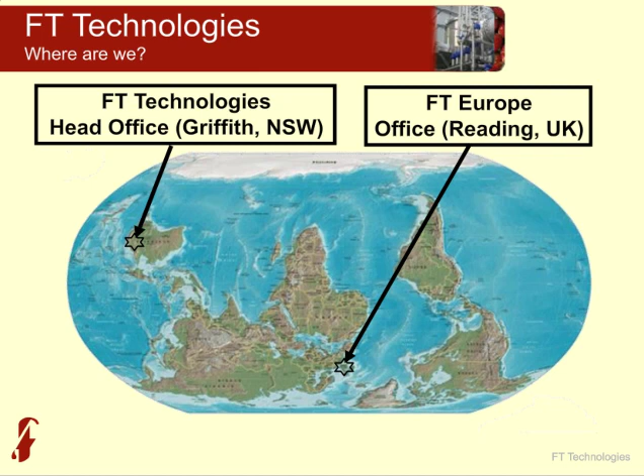So regarding today's webinar, you will find out about our spinning cone technologies. We'll spend a bit of time going through the detail of how that technology works, including information about our spinning cone column, our Centritherm Evaporator, and our integrated extraction system.

In addition to technical information, we'll explain how these technologies can be used in various applications in the food and beverage industry to improve your product quality and, in many cases, improve the operation of your business.

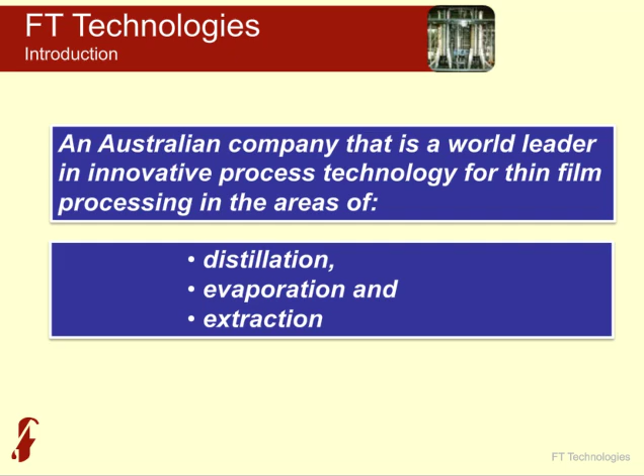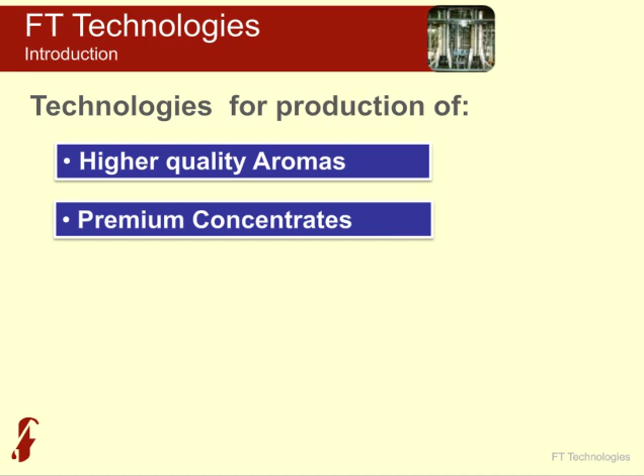We are an Australian company who, for the last 35 years, has been a world leader in innovative process technology for thin film processing, specifically in the areas of distillation, evaporation, and extraction. Our technologies and focus on thin film processing allow us to help customers manufacture higher quality aromas, premium concentrates, and high value extracts.

Using our technologies, we're in a lot of different industries for a lot of different applications. In the coffee and tea industry, we help customers achieve higher value products in terms of producing high value aroma for soluble coffee, liquid coffee, RTD teas, and tea powder. In the dairy industry, we're used by large dairy companies for deodorization of cream, but also for concentration of whey protein concentrates and milk proteins.

In the fruit and vegetable industry, we're used to produce natural aromas from various fruits and vegetables, but also to make high quality concentrates where we can retain the active ingredients of the products, as well as high contents and yields of polyphenols, antioxidants, etc.

In the pharmaceutical industry, our thin film technology is used to produce high-value products and for solvent removal. For botanical extracts, high-value products such as aloe vera and echinacea are processed through our technology. The protein industry uses it for soup stock concentration and bacterial broths, and the fats and oils industry for deodorization of vegetable oils and production of omega-3 fatty acids.

And in the alcohol industry, it's used for removal of alcohol from beer and wine to produce medium strength wine and beer, but also zero alcohol wine and beer.

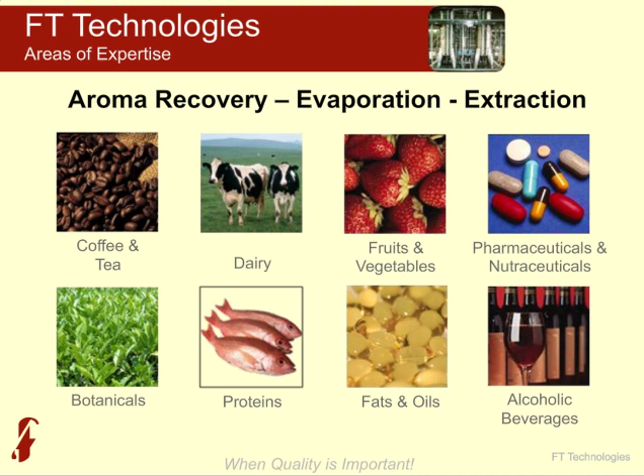So what we do in all of these industries is help you, the customer, grow. Customers keep coming back to FT Technologies—every year, 25 to 30% of our sales are due to existing customers returning, telling us that our technology is helping them grow and differentiate their product.

They tell us it's assisting them to make a premium product that allows them to differentiate from their competitors. It's allowing them to quickly and easily bring new products to market, and to increase their market share not only in their existing domestic market but also in other export markets.

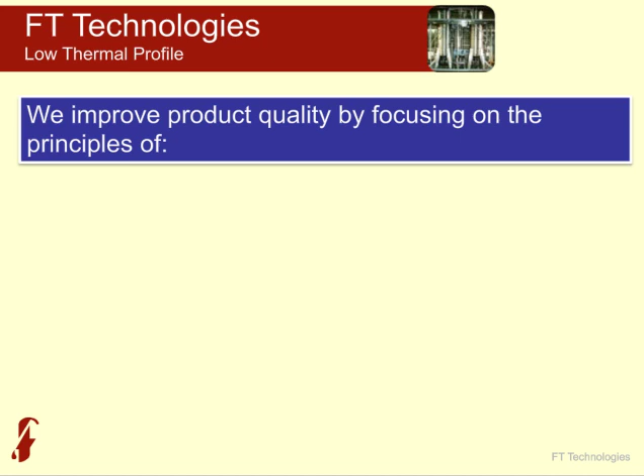Part of our expertise is focusing on the principles of low thermal impact. What we do is ensure that all our technology has short residence times and lower temperatures than competing technologies out there. Some of our equipment has heating times of only, say, one second to create a concentrate that is more concentrated than other technologies, and also has a higher yield of the active ingredients and color you're looking for. All our technology is built on a skid and is a continuous automated solution with clean-in-place functionality.

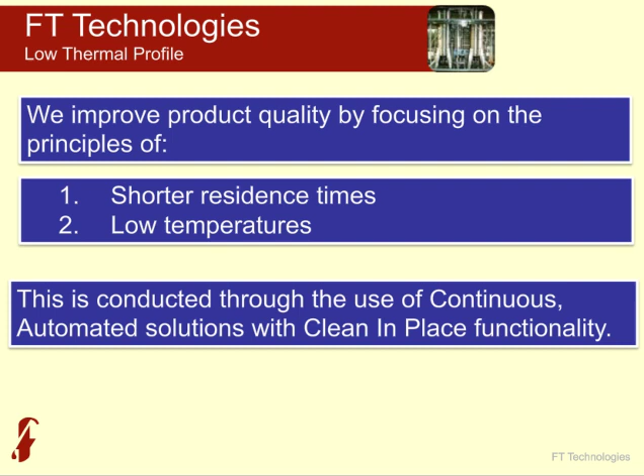Let's begin by looking at our first technology, the spinning cone column, which we developed 35 years ago specifically for the wine industry, but very soon found out that there were so many applications that we're still finding new applications 35 years down the track.

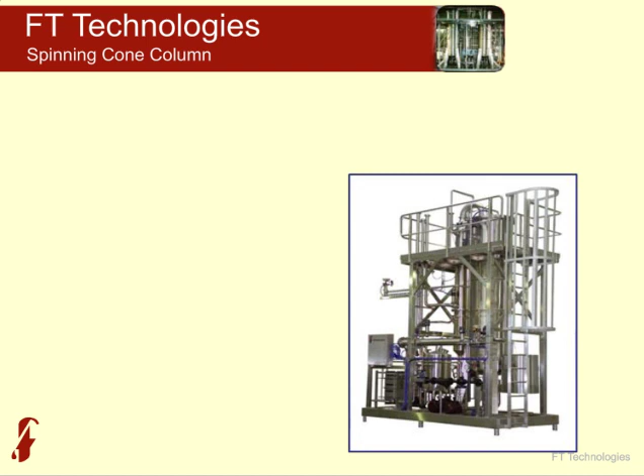The spinning cone column falls in the same family as other distillation columns, but more correctly is a steam stripping device where steam is used to remove the volatiles such as aroma or flavor from a liquid product that is spread thinly over the spinning cones. I'll explain that shortly.

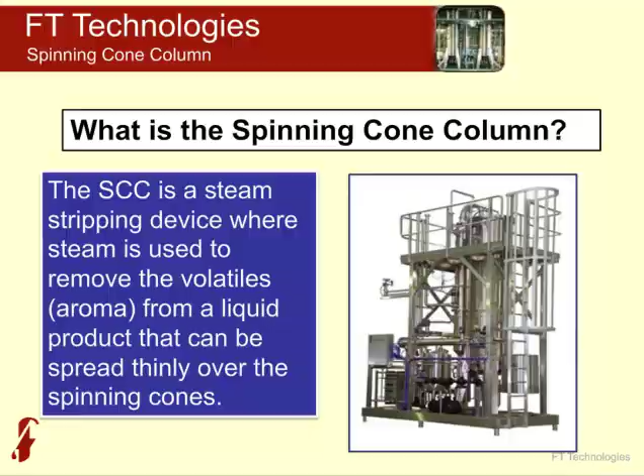The spinning cone column is unique compared to other distillation columns in that not only can it process clear liquids, but it can process slurries. By slurries, I mean tea leaves mixed with water, or coffee beans that are crushed and mixed with water being processed through the system, or viscous products. Some of our customers process mango pulp or banana pulp directly through the spinning cone column to remove the true natural aroma of the product. Products up to 7,000 centipoise can actually be processed in a thin film to remove the light volatiles that are so critical to creating a fresh aroma.

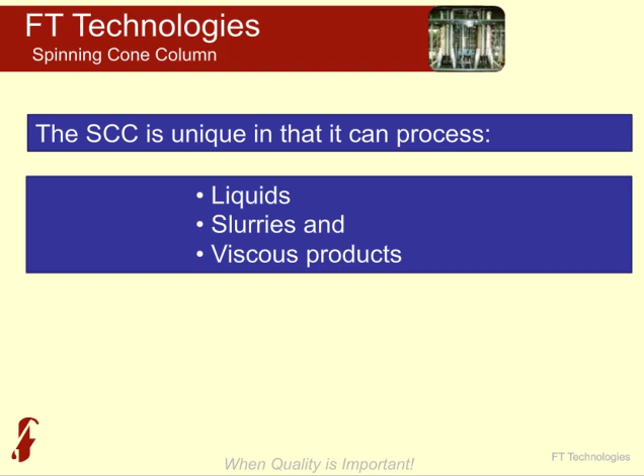The spinning cone columns create a thin film of only 1 millimeter across the surface, enabling short residence times and low temperatures to be used in the aroma extraction process.

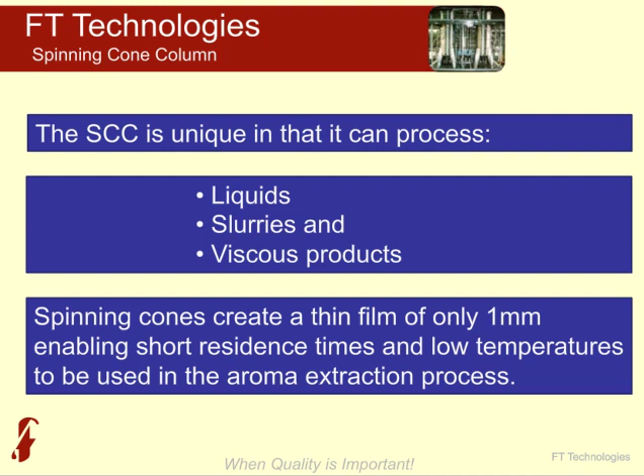The SCC is principally used for aroma recovery, and as mentioned, it can be from fruit, vegetables, meat stocks, alcohol. Various products can be processed through the spinning cone column easily and flexibly. It can also be used for flavor management. Some of our customers ensure that they have a standard product year-round, regardless of seasonal variation to their product, by processing through the spinning cone column.

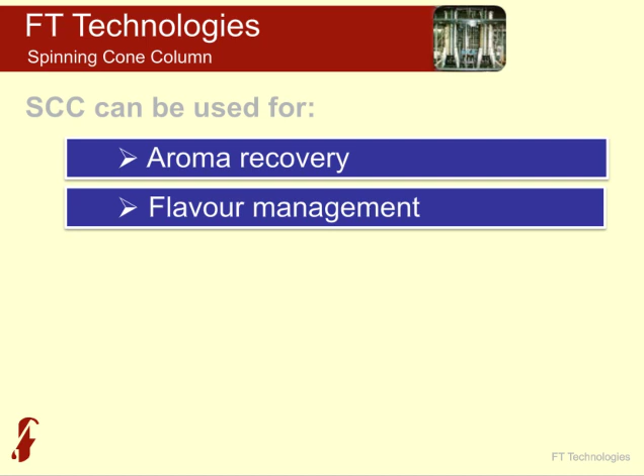In some industries, such as the ready-to-drink tea industry, at the same time as removing flavor or aroma, we can be extracting the soluble solids from the product. That is, brewing the tea within the column in that short period of time.

And in yet other industries, at the same time as removing the aroma, we can be pasteurizing the product if the temperature and time frame permits.

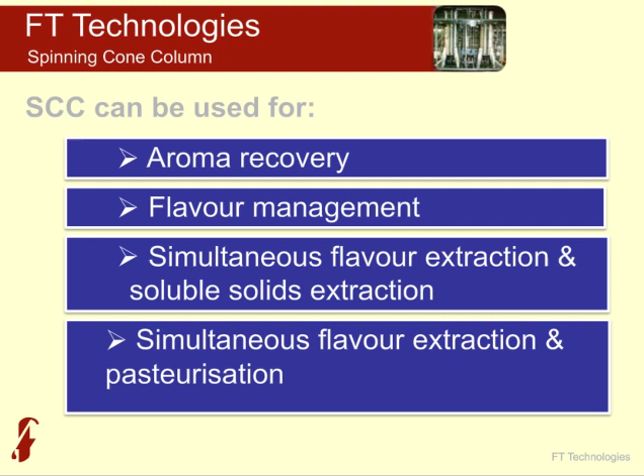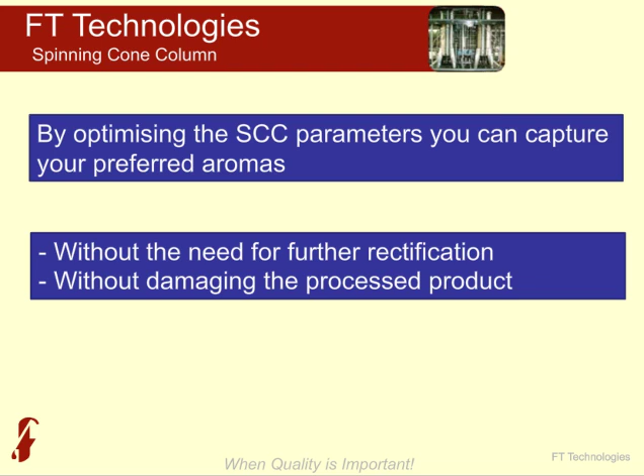One of the unique features of the spinning cone column is that we can optimize various parameters to capture a preferred aroma. This means the aroma that's coming out has no need for further rectification, but is the final aroma that you want to add back to your product. Also, during this processing and aroma recovery stage, there is no damage to the product being processed, so it can still be used downstream with no damage to color and no damage to any other constituents in the product.

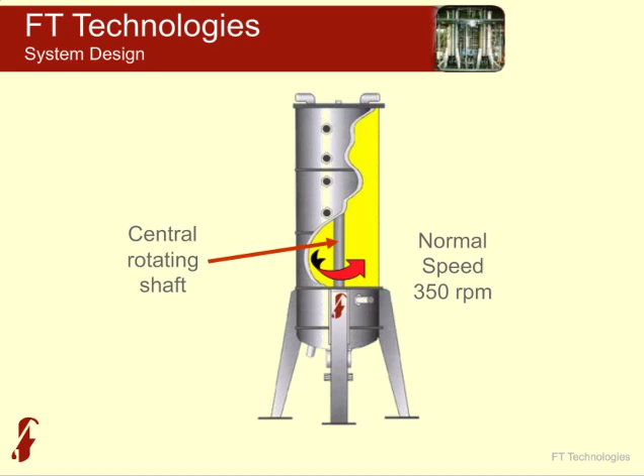So let's have a look at the spinning cone column itself. It is a large column with a central rotating shaft that is spinning at 350 RPM. It has a belt-driven motor, making it easy to maintain. Attached to that shaft, we have these upside down spinning cones. As you can see, these spinning cones also have a fin attached to their underside, which helps the steam circulate through the column, picking up those delicate volatile aromas.

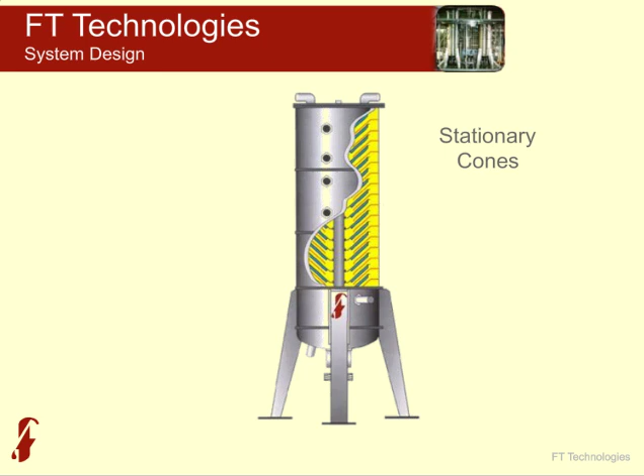The product enters through the top of the column and falls on the first stationary cone, and by gravity runs down that first stationary cone, creating a thin turbulent film where it falls on the second spinning cone, and the centrifugal forces of the spinning cone send it back up the cone where it hits the wall and falls on the stationary cone below, running down again by gravity, falling on the next spinning cone, and so on and so on.

All in all, a thin turbulent film is produced. The film thickness is maintained at 1 millimeter, and the whole residence time that the product is within the column is only 25 seconds. In 25 seconds the aroma is recovered, all the delicate components of the aroma are recovered intact, and there is no damage to the product.

And in some applications, as I mentioned, such as tea, the tea is also brewed in that same period of time.

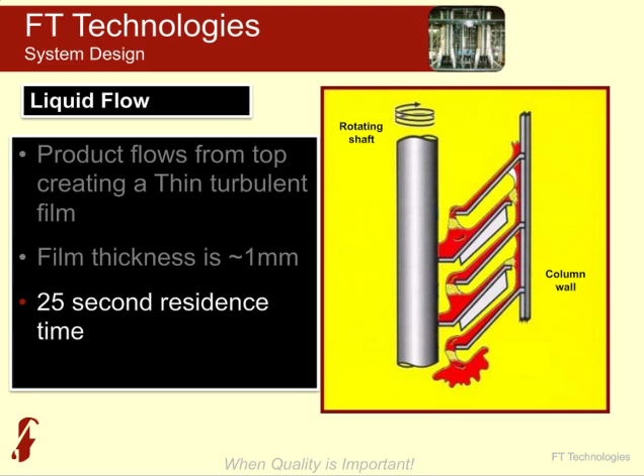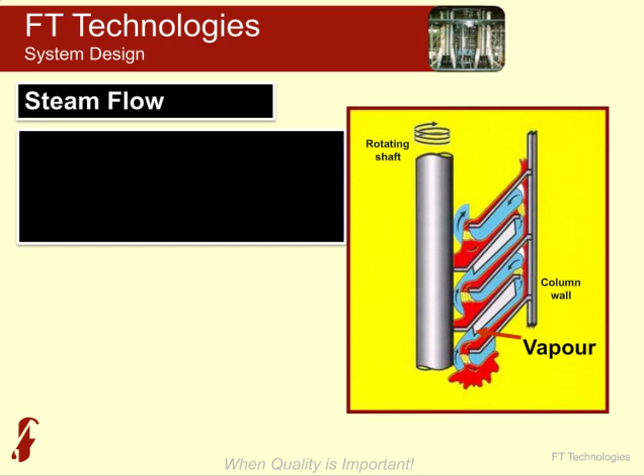Now, what about the steam, you say? Well, the steam enters from the bottom of the column, shown here in blue, and goes in the opposite direction to the product. So the product, in red, enters from the top of the column, running down the cones, and the steam enters from the bottom of the column, assisted by fins on the underside of the spinning cones, and circulates. The two phases of steam and liquid product interact, where the steam picks up the aroma of the volatiles from the product.

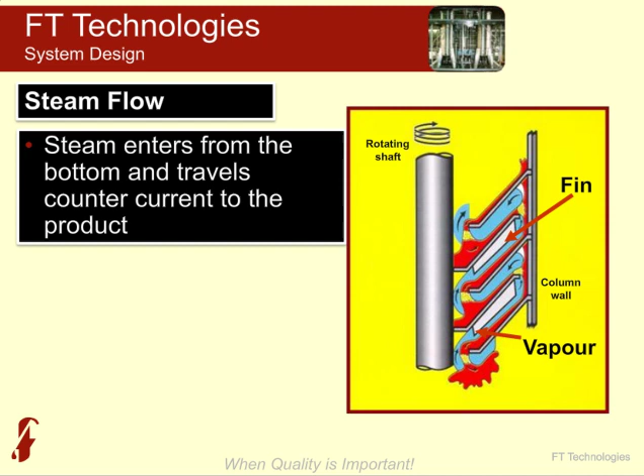Those volatiles are taken out from the top of the column, where they are then condensed to produce a clear liquid aroma. Remember that we can control various parameters of the spinning cone column to ensure that we capture the volatiles that are of interest and desired by you, the customer.

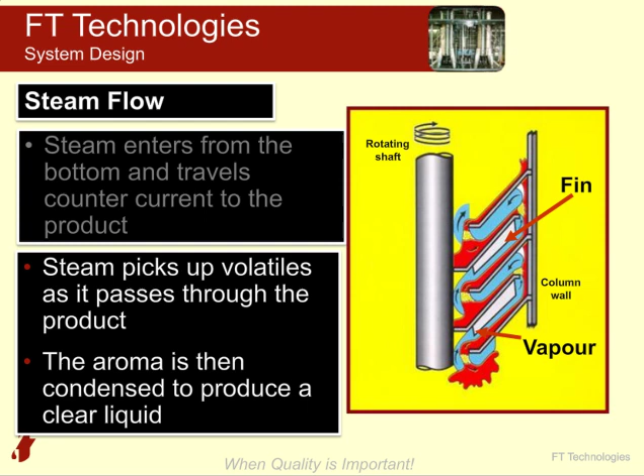Parameters such as temperature of the product and temperature of the steam can all be controlled. Ideal operating conditions can be selected for each of the products to preserve the delicate flavors that make that product unique. So for products like coffee or tea, processing conditions of, say, 100 degrees Celsius can be used, whereas for fruits, different temperatures are used.

For example, for pineapple, it may be a temperature of 75 degrees. For apple, 65 degrees. For more delicate aromas, such as those from peach or strawberry, temperatures of 45 to 50 degrees Celsius can be used. And each system can be used for multiple products.

The desired aroma profiles are collected using varying operating conditions, such as temperature of the product, temperature of the steam, and amount of stripping steam to collect the desired aroma. So let's have a look at some examples.

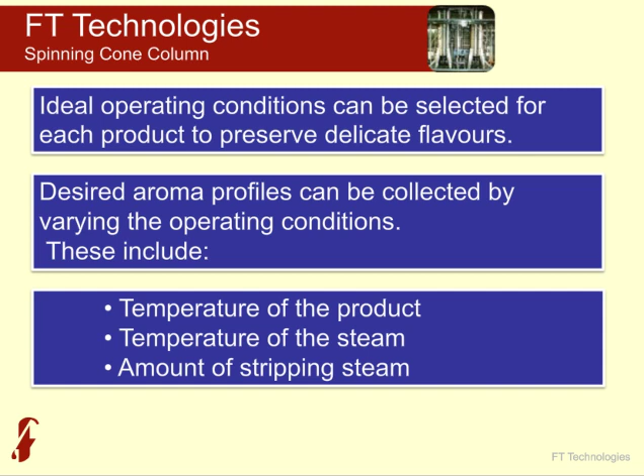One of the main industries that we find ourselves in is that for soluble coffee. It's quite possible that that instant cup of coffee that you're having right now has been made using the spinning cone column. The spinning cone column is considered the gold standard for aroma recovery in the soluble coffee industry worldwide. Currently we have over 70 spinning cone column installations around the world in soluble coffee, ranging from Brazil to Europe to Africa to Australia and to most parts of Asia.

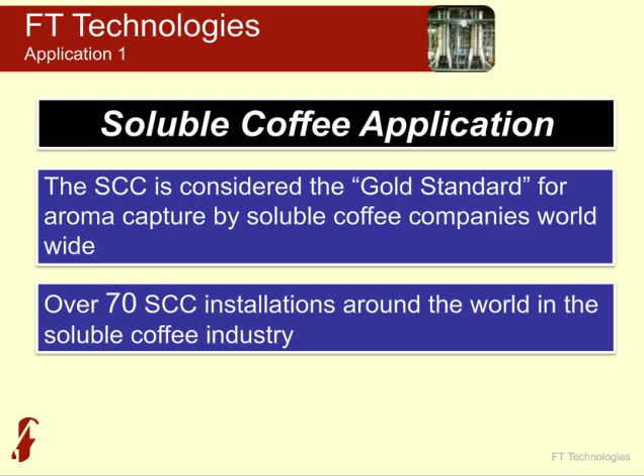Most of our customers know very well that flavour is lost at every single step in that process. In fact, some of our customers have told us that if they had 100 flavour units at the beginning of the process, if there was no aroma capture at all, they would end up with less than 10 flavour units.

So how do we help? The spinning cone column is installed directly after the extractors. The extract coming from the extractors is processed through the spinning cone column and the desired aroma captured, then added back to the concentrate before it goes to the spray dryer. In this way, the major flavour losses which occur at the concentration step are bypassed.

Now, some customers don't add the flavour back to their concentrate in the storage tank, which may still be at elevated temperatures, but add it back in line just before it goes through to the spray dryer. Other customers add back the flavour to the agglomeration step. Other customers still don't use all their flavour back into their product, but on-sell their flavours to other companies that may use them for biscuits, savoury products, or even fragrances.

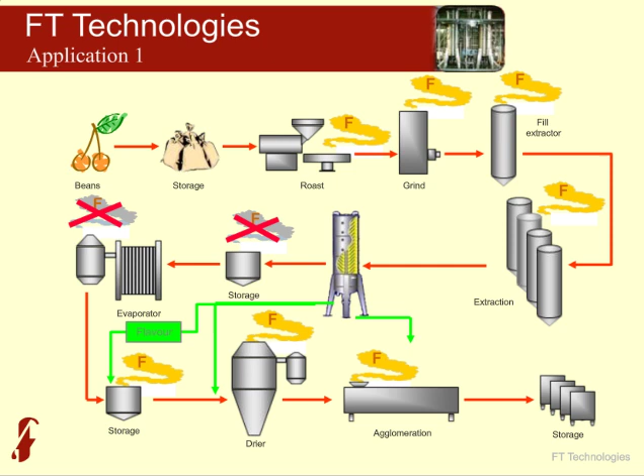The coffee produced contains more roast and ground flavours than would typically be possible. Our customers can produce different flavour profiles so they can present their market with a range of new products - a standard product, a premium product, and a super premium product on the shelf.

They can also meet changing taste profiles. By easily operating the spinning cone column, they can have a mild, medium, or strong flavour of coffee in their individual products. They can also meet the demands and different taste preferences of export markets, allowing them to easily export the product to other countries, and all this assists them in growing their sales and increasing their market share.

Let's have a look at another application, and that is for ready-to-drink tea. Ready-to-drink tea is a growing industry worldwide, with market forecasts suggesting that in the US alone, the ready-to-drink tea industry will grow by 15% every year for at least the next 5 years.

Consumers are turning towards ready-to-drink tea products rather than fizzy pop drinks due to the health benefits associated with drinking tea - antioxidants, polyphenols, etc.

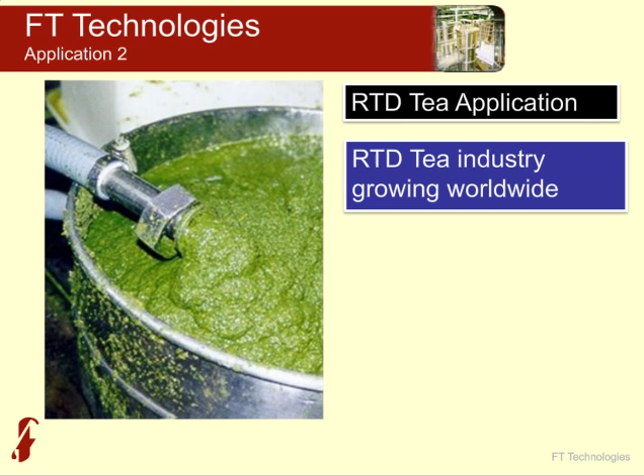The spinning cone column in 25 seconds can not only capture the true essence of tea, but can also brew the tea to produce a high-quality extract.

In this photograph shown here on the left, it is a tea slurry, and remember, a slurry is tea leaves mixed with water. In this case it's a 10% slurry of green tea, so 10 kilos of tea have been mixed with 90 kilos of water to be processed through the spinning cone column.

What you see is the discharged green tea, so what has been de-aromatized coming out from the spinning cone column. The vibrancy of the green tea is still there, but this product no longer has aroma associated with it, as the preferred aroma has been removed.

This slurry would then be clarified so that the solid tea leaves are removed, leaving behind a high-quality tea extract that can be bottled, with aroma added back, and other flavors, to produce a consumer product that is preferred and allows you to attain greater market share.

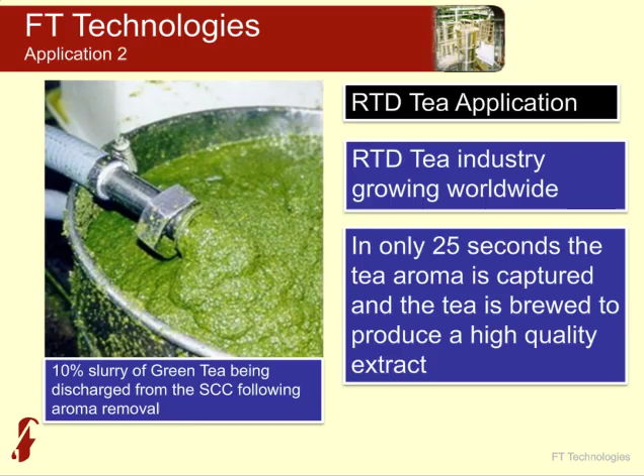As mentioned, aroma capture and the brewing of tea occur at the same time, and it is a continuous system for the brewing of tea, which reduces batch-to-batch variation and reduces labor costs because it's all done through the spinning cone column in a continuous manner, rather than the typical tea brewing process, which is a batch tank where the tea leaves are added, boiled for between 5 to 10 minutes, and then the tea leaves separated.

It reduces waste, and it also reduces possible operator error. But more specifically, it captures the real, true aroma of the tea product.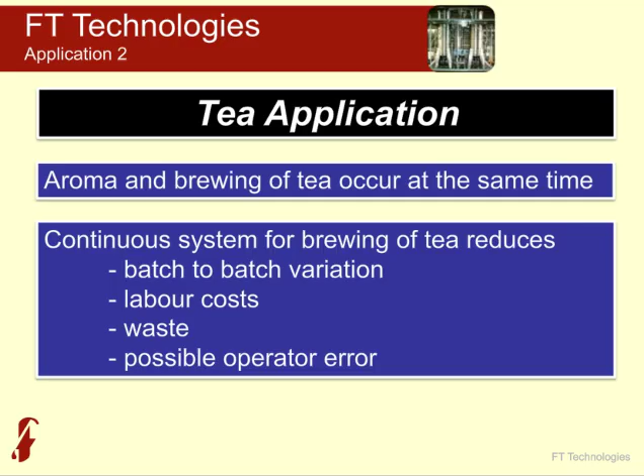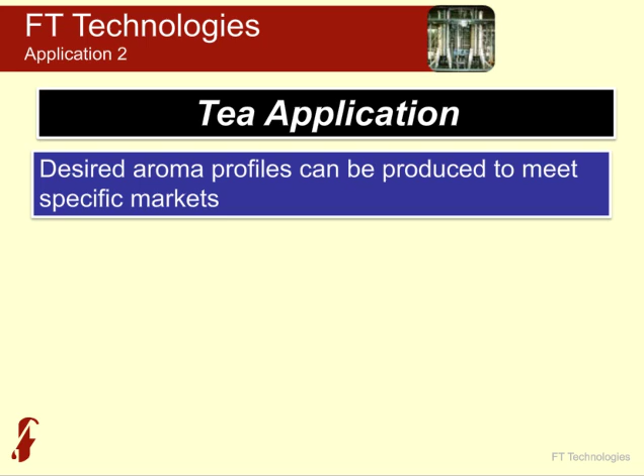Desired aroma profiles can be produced to meet specific markets. From the one tea, you can have various aroma profiles being collected to meet consumer demand. If you are a toll processor, you can approach your customers with various tea aromas and ask them, which one do you like? I can produce any of them.

Tea aroma and tea extract for ready-to-drink products can be packaged in either bottles, bag-in-box, or individual serve sachets, allowing you to approach the market at various points. Today, we're pleased to say that the majority of natural ready-to-drink tea products in the USA are actually produced using the SCC technology.

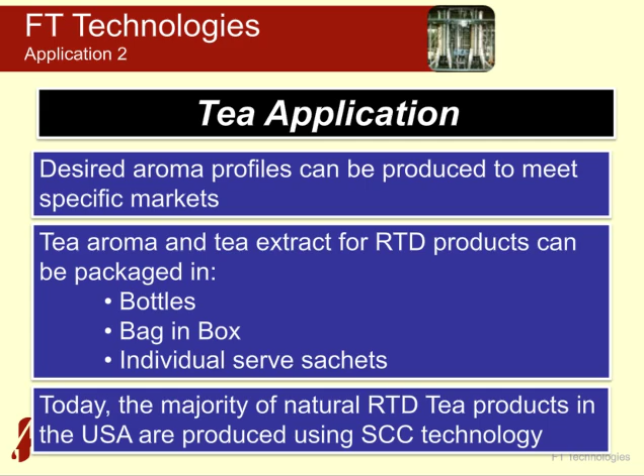So let's have a look at the spinning cone column and physically what it looks like. Our smallest unit, which we also have in our pilot plants, has a nominal volume of 1,000 litres per hour. Of course, as the product gets more viscous, that volume throughput decreases in order to maintain the thin film.

The SCC 1000 has semi-automatic control. It has a footprint of only 2 meters by 2 meters and a height of 4 meters. It is really plug and play.

What you see there is how the system arrives at your factory. It's a skid-built system with heat exchangers, pumps, condensers, feed tank, all on board that skid. So once it's stood upright and services are connected, it is ready to go to work.

It also offers clean-in-place functionality, allowing you to quickly and easily go from one product to the next with only a 1 to 1.5 hour CIP process.

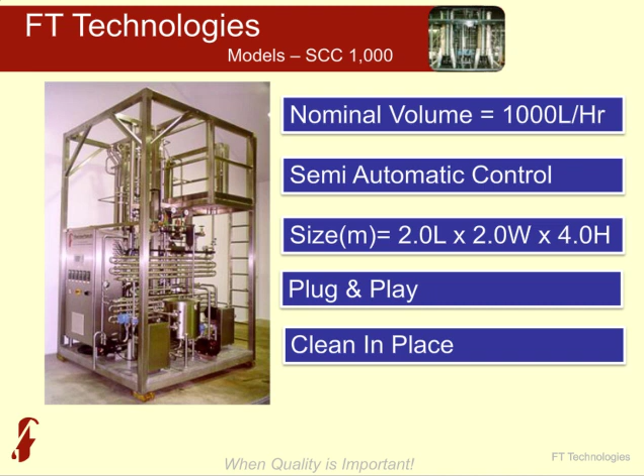The next system up is the spinning cone column 10,000. This has a nominal volume of 10,000 litres, but as mentioned before, as the product viscosity increases, that volume has to decrease. This is a fully automated system, all built on the skid, again containing all pumps, condensers, heat exchangers, built specifically for the customer's application.

Size, it has a length of 5 meters, depth of 2.2 meters, and a height of 6 meters. Although it is such a large system, it only takes us 5 days to install, followed by connection of services, commissioning, and training. It also offers clean-in-place functionality, allowing you to insert the system easily within your current process and clean it quickly, going from one product to another with very little time in between.

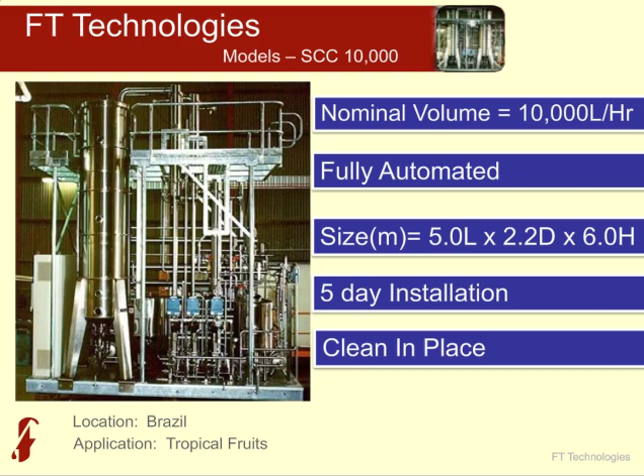Of course, if you wanted greater capacity, we can add a second column, third column, or fourth column to the same skid, making it a much larger system.

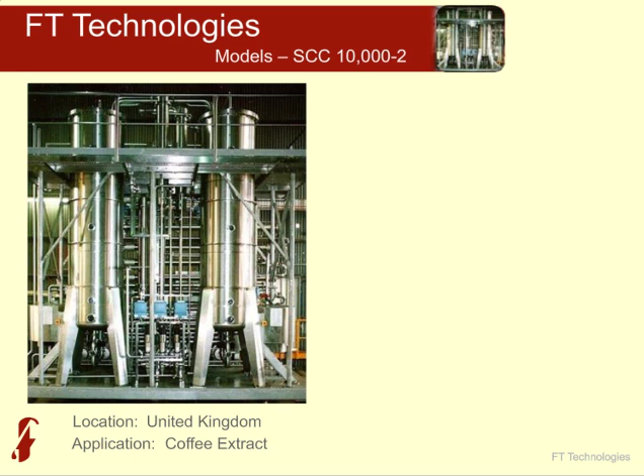In this particular picture, it is a spinning cone column 10,000-2, which is a double column, and this one's used for coffee extract, aroma recovery from coffee extract in the United Kingdom. The nominal volume would be 20,000 litres per hour for this system. It's fully automated and integrated within the current customer process, and it has a dimension of 6.5 meters in length, 2.2 meters in depth, and 6 meters in height.

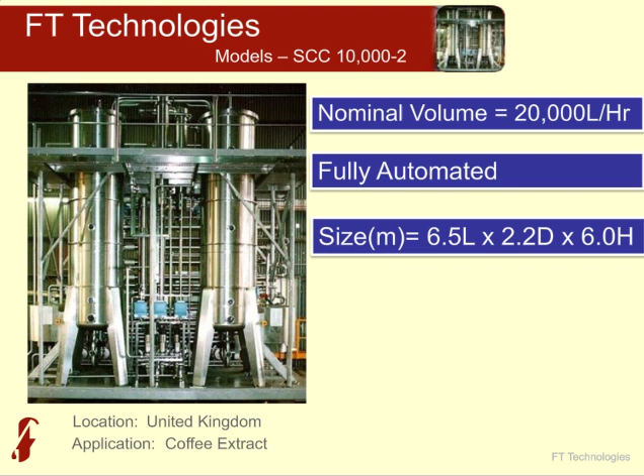7-day installation, and of course, clean-in-place functionality. So that's all about the spinning cone column. If you have any further questions, please don't hesitate to contact us. But for manufacturing gold standard aroma products and helping you differentiate your product in the marketplace, the spinning cone column offers the best of everything.

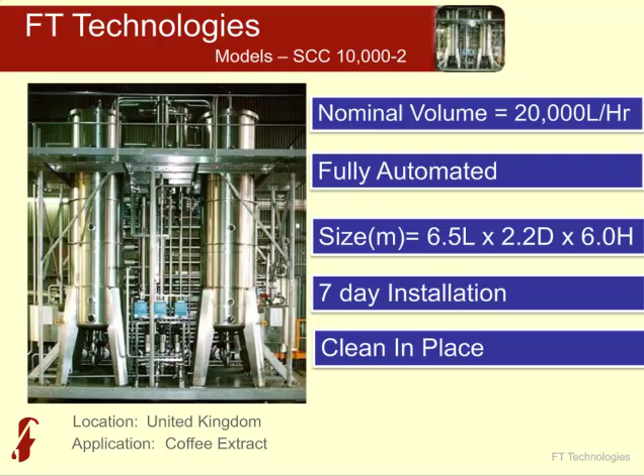When you have a need to concentrate a heat-sensitive, high-value product, the options for doing so are quite limited. Freeze concentration is expensive, and going directly to a freeze or spray dryer from a low concentration results in low yields, poor quality powder, and high operational costs. Many of our customers have solved these problems with the installation of a Centritherm Evaporator. Delicate and heat-sensitive products can be concentrated in a single step. In some products, it's possible to concentrate from 10 Brix to 65 Brix with no thermal damage.

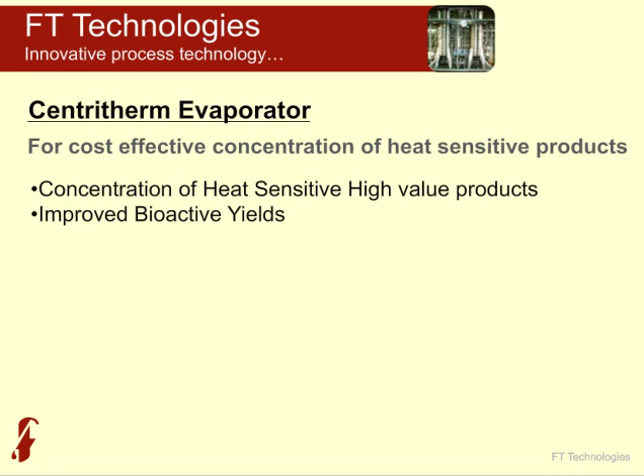When feeding a spray dryer, the powder quality is improved with better bulk density and solubility. This is combined with better yields, resulting from lower fines production and less thermal damage. Colour and flavour changes are also eliminated. The result is a higher quality product that costs less to produce. The Centritherm will gently concentrate with only 1 second of contact time on the heating surface, using a product temperature of only 50 degrees Celsius or 122 degrees Fahrenheit.

Here you can see one of our larger units. We call this the CT9. It can evaporate up to 2,400 litres per hour, assuming a 10 Brix sugar solution and concentrating that up to 65 Brix. It is characterised by a compact footprint. We manufacture these with all of the components on the skid to provide a genuine plug-and-play or turnkey solution. We produce these in a range of sizes with capacities from 50 litres per hour up to 7,000 litres per hour. All of these with only 1 second of heat contact time.

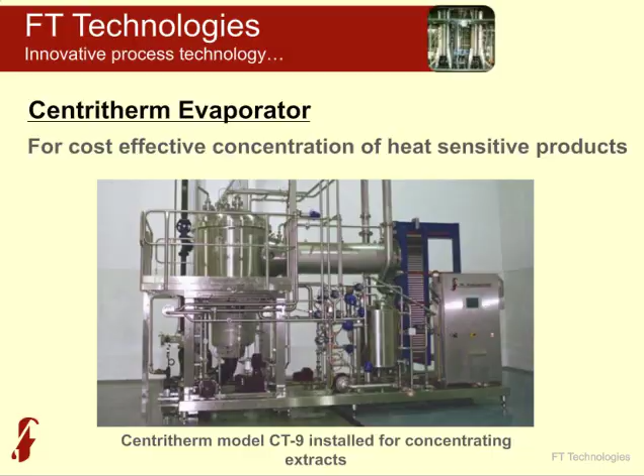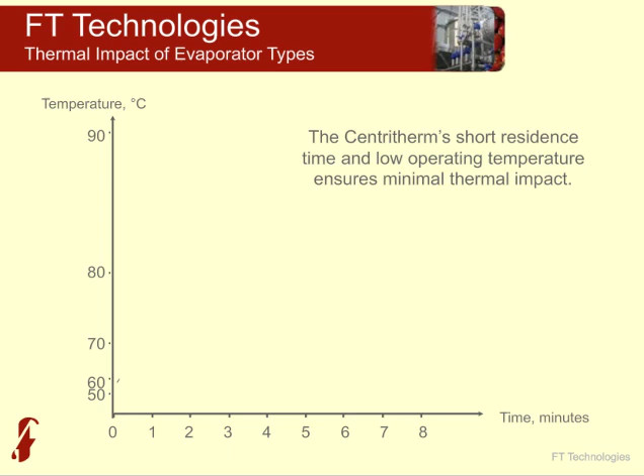So why is it that the Centritherm can concentrate with such low thermal impact? This slide demonstrates this quite effectively. It is a function of both time and temperature. Traditional evaporators will use 3 or more effects in a series of either plates or tubes, which the product will rise or fall past. During the contact with the heating surface, heat will be transferred and the solvent, which may be water, alcohol, or another material, is evaporated.

Here you can see typical time and temperature profiles for 3 common types of evaporator. The product must spend an extended period of time at higher temperatures. Now compare this time and temperature profile to the Centritherm. The difference could be likened to quickly brushing your hand against a hot surface compared to placing your hand on the surface for several minutes. With a brief touch, you will feel the heat but not be burnt. However, if you leave your hand there for an extended period of time, it will be burnt.

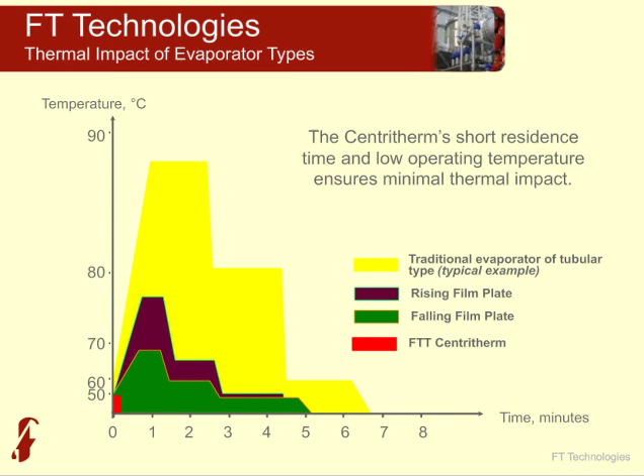So, how does the Centritherm evaporator achieve this remarkable performance? The key is the creation of a fast-moving and highly turbulent film. As you have heard previously, thin film technology is FT Technology's area of core expertise.

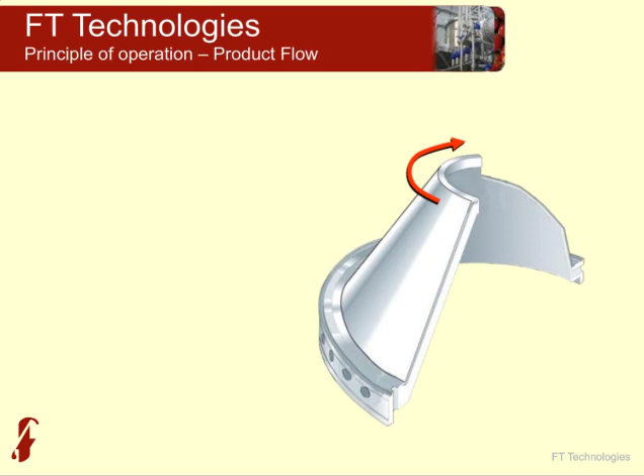The product is dispersed via a feed nozzle onto the underside of the cone. The cone is rotating and heated. Centrifugal force rapidly and consistently disperses the liquid over the surface of the cone. The product spends approximately 1 second on the cone before being pushed out of the evaporator by centrifugal force.

It has similarities to the spinning cone column in that it utilises a thin, fast-moving, turbulent film, except in this case the cones are in the opposite orientation, and the product moves down the spinning cone instead of up the spinning cone.

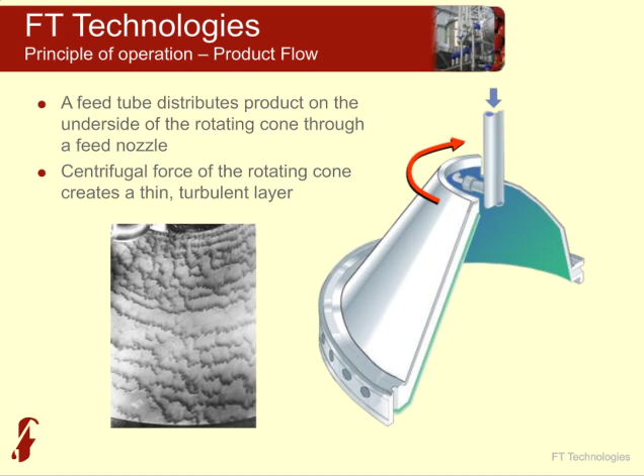So now let's talk about some specific applications of this technology. Firstly, I'll talk about an application in South America in the coffee industry.

The customer, who we cannot name due to confidentiality reasons, produced a very high quality freeze concentrated and freeze dried product. The problem was that this process was both expensive and unreliable, unreliable because it depended on a consistent supply of electricity, which was not available in this region.

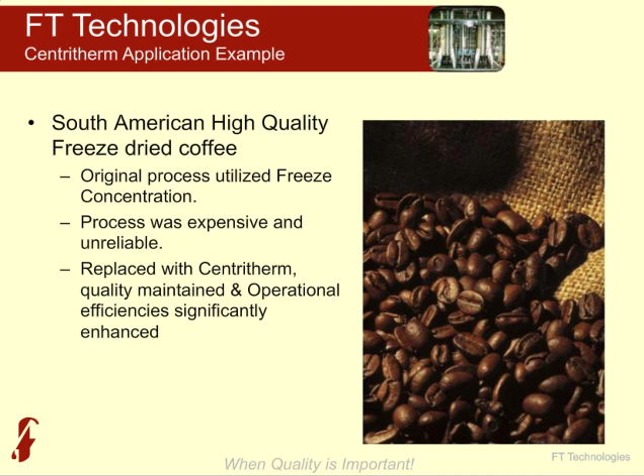The critical driver in this project was maintaining product quality. The taste, the flavour, the quality of this premium coffee could not change. We replaced the freeze concentrator with the Centritherm Evaporator. Not only was the quality maintained, but operational efficiencies were significantly enhanced. It was a $1.4 million project, and the payback was less than 1 year. The operational savings were in the order of $2 million per year.

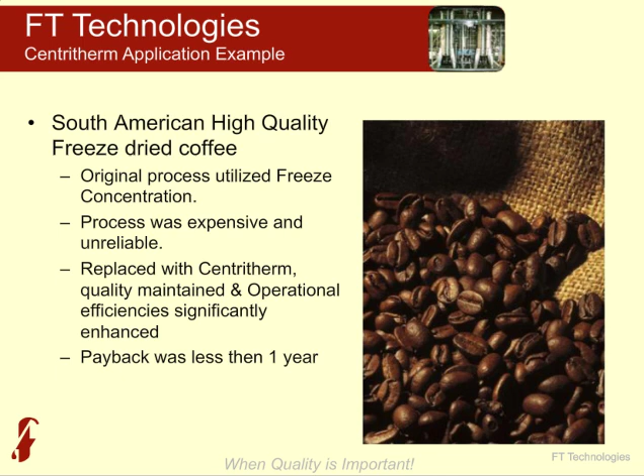In the pharmaceutical industry, we have a number of installations processing high value and highly heat sensitive products, like fermented bacterial broth and antibiotics. The implementation of the Centritherm results in higher potency and higher yields, which effectively means higher value of the product that is sold, and often lower energy costs to produce it.

The Centritherm is used widely in concentrating vitamin C, once again to improve the bioactive yields with no change in colour to the finished product.

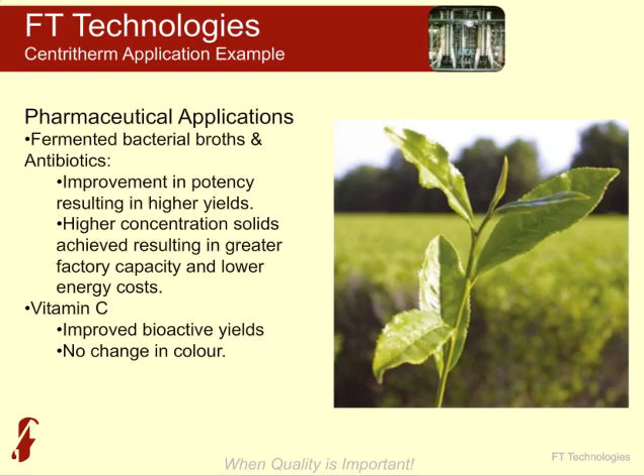Tropical fruits are another good example. We have more than 25 installations processing passion fruit. Passion fruit is highly heat sensitive and the quality deteriorates rapidly at temperature. The Centritherm is the industry standard, or gold standard, for this industry when it comes to concentrating passion fruit.

In the vegetable industry, we have a number of installations in Japan processing carrots. The Centritherm was selected for these applications because of the higher yield of carotene in the finished product that was generated when using the Centritherm.

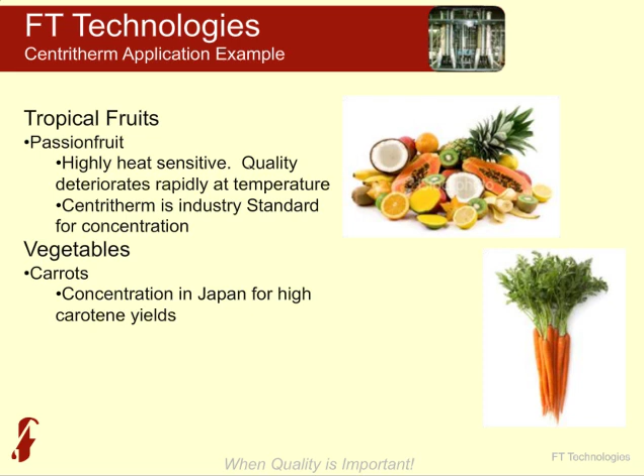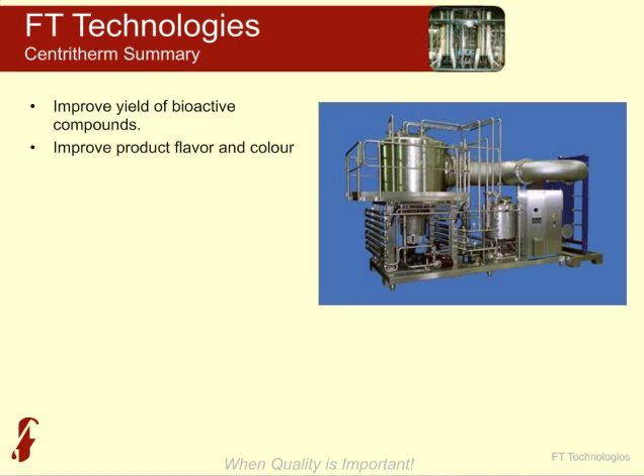So to summarise, you would use a Centritherm if you were processing a heat-sensitive, valuable compound, in order to improve your yield of bioactive compounds. Or if it was a delicate flavour, you'd use it to improve your product flavour and colour. If you're sending this product to a dryer, you'd use it to improve your operational efficiency, to increase your dryer throughputs, and improve the quality of the spray-dried product without any impact on the bioactive yields. So you maintain your quality, in fact improve your product quality whilst reducing your processing costs.

So effectively, the Centritherm is used for concentration of heat-sensitive compounds, and in some cases achievement of higher total solids than a conventional evaporator. So it may be a product that is processed through a traditional evaporator and sent to a dryer, and we have applications where we have installed a Centritherm post the evaporator before the dryer to increase capacity. This has purely been a capacity-driven project where the implementation of the Centritherm has saved the customer from having to buy a new spray dryer.

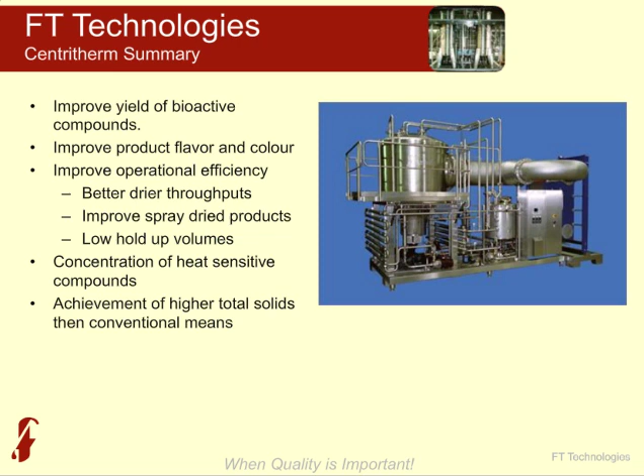So in summary, if you need to cost-effectively concentrate a heat-sensitive compound, we're able to review with you your product and your process and determine whether a Centritherm evaporator can both improve your quality and decrease your costs.

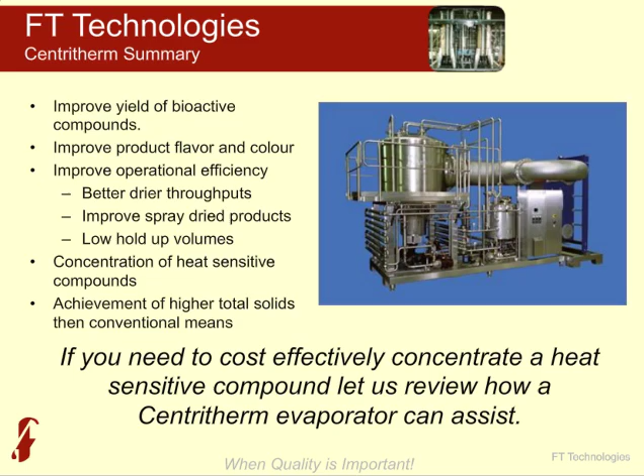What I'd like to do now is hand back to Leon, who will go through the integrated extraction system. Basically, the integrated extraction system brings the technologies from both the spinning cone and the Centritherm Evaporator together to give you a total solution. Thank you, Leon.

Thank you, Con, and also thank you, Aubrey, for the presentation on the Centritherm Evaporator. As Con mentioned, the integrated extraction system was developed by us to bring both technologies together, but we didn't do that on purpose.

We were first approached by a customer that took us into their factory and said, hey, look at my factory. I have vats boiling over there, people running around here, forklifts driving through there. It's a mess. There's pipes here, there's pipes there.

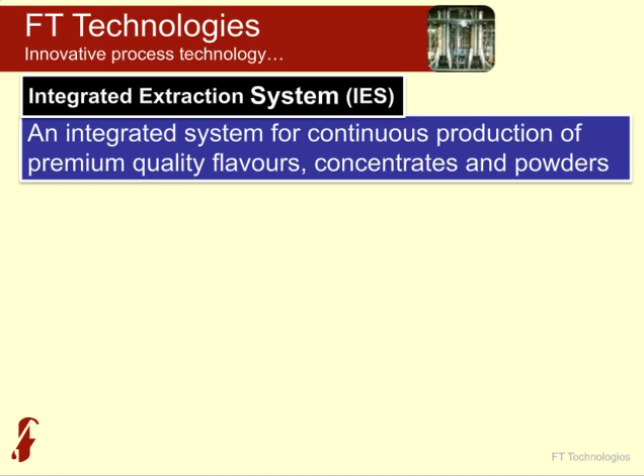That wet milling technique really helps protect those key high volatile aromas. For example, if you're cooking dinner and you're cutting some vegetables or some fruit, those aromas that you can smell are those light volatiles that are disappearing into the room and no longer in the product. What we do with that wet milling technique is capture those light volatiles during that cutting process.

The customer then ends up with two high-quality products, a high-quality desired aroma and also a high-quality concentrate, which they can blend back into the portions that they like or sell as individual products to their customers for their own blending back. So you can see this whole system is quite compact, it's quite clean, it's continuous, and can be operated by only one person.

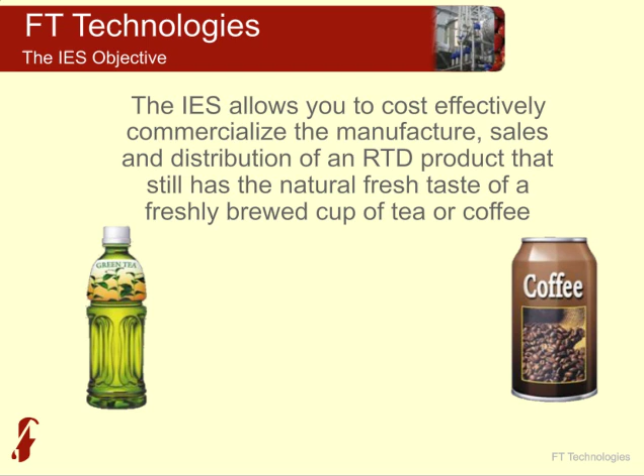So the spinning cone column at FT Technologies has allowed customers in the flavor industry to produce high-quality flavors since the 1980s. During that time, our R&D department established that the best flavor doesn't actually come from processing an extract, but by processing a slurry, in that way capturing the true natural aroma of the product that's being processed.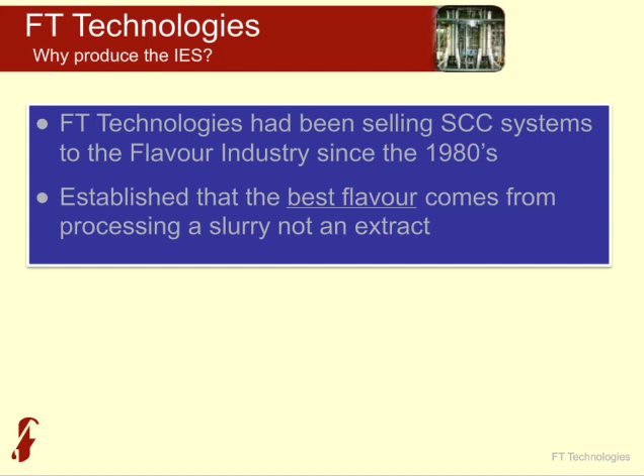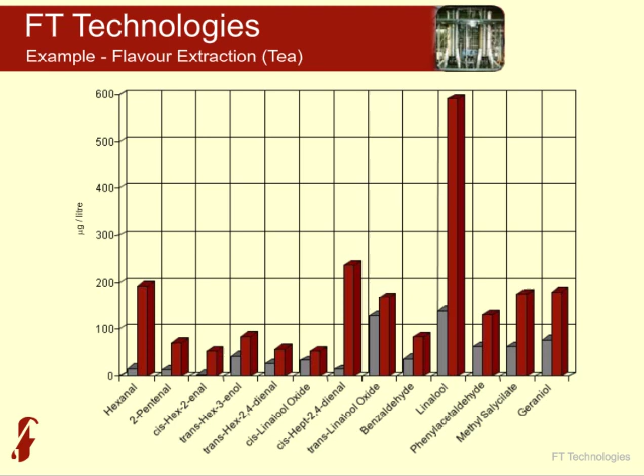This next slide here is some information from a GC analysis that has been provided to us from a customer, showing the various flavor compounds present in tea and the quantities that have been captured in the aroma recovery process. In grey, we have the aroma compounds that have been captured by processing an extract, and in red we have the aroma compounds that have been captured by processing a slurry through the spinning cone column. As is clearly indicated, the amount of compounds and the quantity of those individual compounds is much, much greater in the spinning cone column when processing a slurry.

So let's have a look at that IES process as a block diagram again, so it's quite clear.

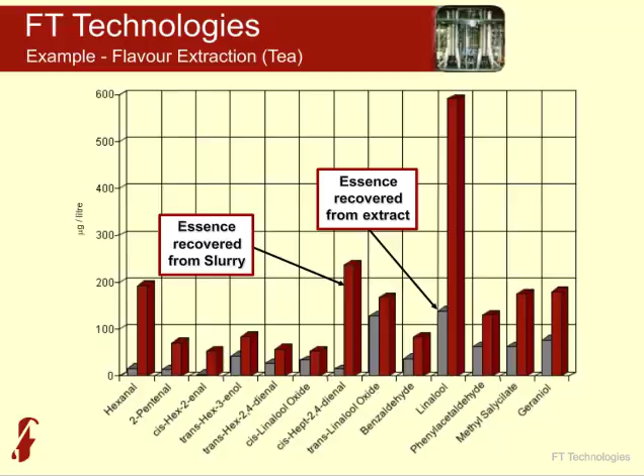The raw material, be it tea leaf or coffee beans, if you're making ready-to-drink products, is processed through the slurry preparation stage, where water is added to blanket the product during milling and create a slurry. Typical slurry content for a tea product may be up to 10%, whereas for coffee, up to 20% slurry may be utilized—that's 20 kilos of coffee per 80 kilos of water.

That slurry then goes into our flavor extraction system, the spinning cone column, where the operating parameters can be set to capture the desired aroma.

The desired aroma is then taken away and stored in a refrigerated tank to be protected, whereas the de-aromatized slurry goes into a clarification step. Depending on how clarified the product is required to be, this can involve decanting, a press, centrifugation, and even a membrane system.

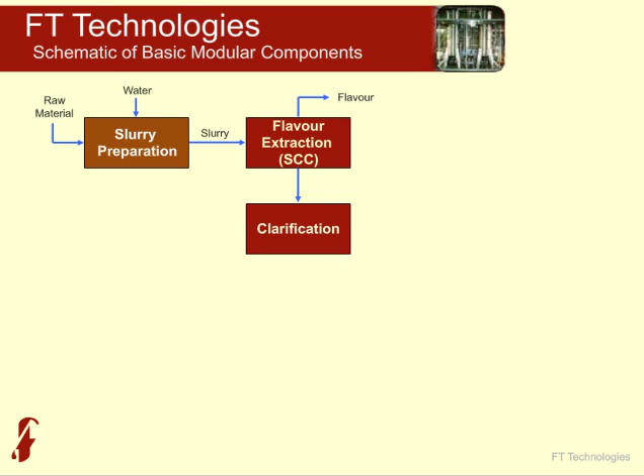The solids are removed during the clarification step, and the clarified extract goes to the concentration step, which is our Centritherm evaporator, where the product is concentrated to the desired level, at which point the aroma or flavor can be added back to produce the desired product.

Our customers can buy the whole IES system as one complete unit, or depending on their requirements, can build stage by stage to obtain a fully functional IES system.

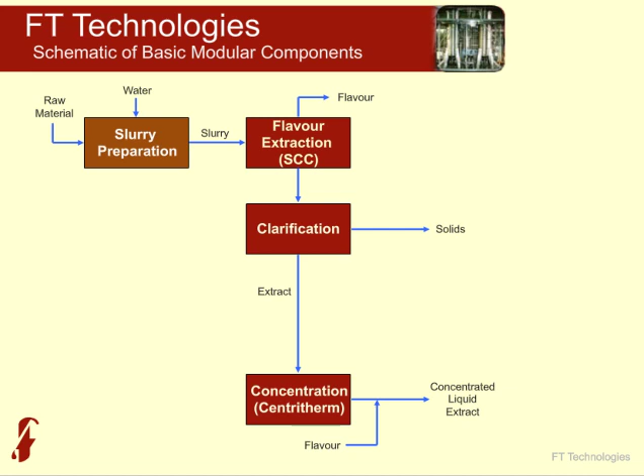Some of our customers are so proud of the spinning cone column that they actually use it in their advertisements. Here we have an advertisement from a Japanese magazine showing the customer's ready-to-drink coffee product with their special coffee machine, which, as you've seen from the pictures earlier, is the spinning cone column. The customer states that their coffee machine allows them to capture the true brewed taste of a cup of coffee and bottle it for the consumer.

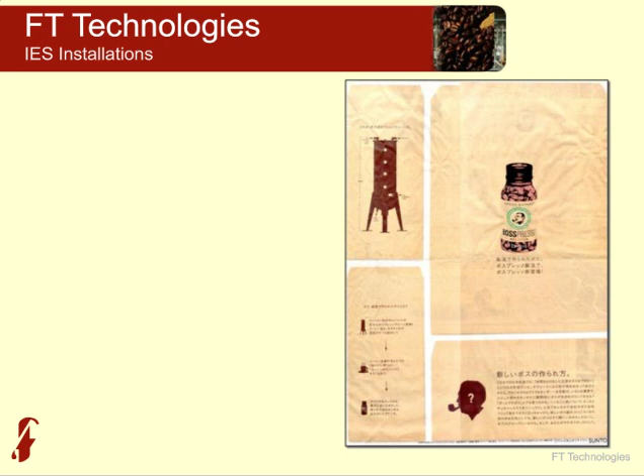So what we try to do with the IES system is produce ready-to-drink products that have the real coffee taste and fresh brewed taste, that can be drunk at any time and picked up from a vending machine or a convenience store.

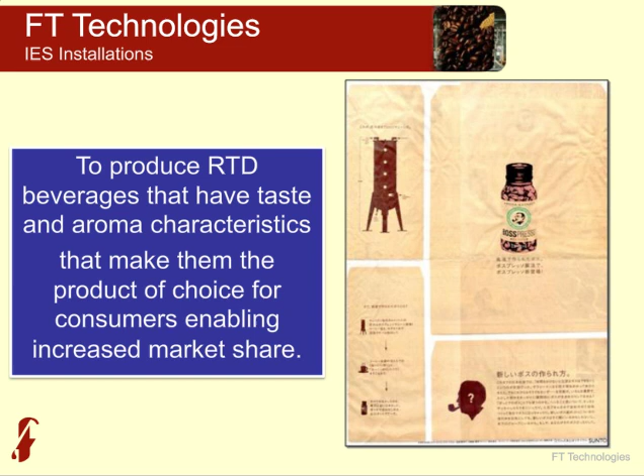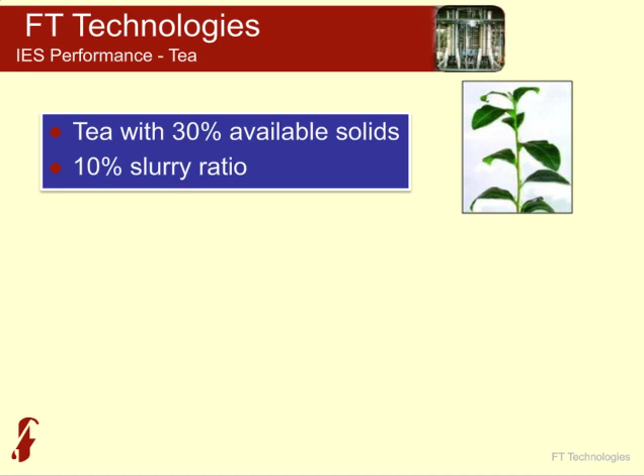One of the other things the IES allows you to do is capture high quality and high yields of soluble solids from your tea products. With an available solid content of 30% and a slurry ratio of 10%, processing through the IES allows an extraction efficiency of approximately 80%. That means out of that 30% available soluble solids, we're capturing 23%—so out of 100 kilos of tea, we would be capturing 23 kilos of soluble solids.

This is much more than your typical brewing process in a batch system, depending on how long you brew the tea. But remember, in that batch process, as you take longer to brew, you're destroying functional ingredients such as the antioxidants tea is famous for, and allowing most of the aroma to escape. The IES system, incorporating the spinning cone column, allows you to capture those delicate flavor notes without damaging the tea, because the brewing time is only 25 seconds.

Most customers would be happy with that 80%, but FT Technologies R&D engineers were not happy—they wanted to see how high an extraction efficiency we could actually obtain. So they did more research, and by incorporating an optional washing module, we can now achieve an extraction efficiency of 95%. So out of that possible 30% available solids, we could obtain 29 of that 30%—out of 100 kilos of tea, we could obtain 29 kilos, if the available soluble solids were 30 kilos.

That extraction efficiency remains the same regardless of the level of soluble solids. So if you have a tea with 40% soluble solids, the extraction efficiency would be relevant to that content in your tea. This is all done in a continuous automated process that requires very little labor, allows you to capture the real fresh taste of the tea product, and obtain high yields of soluble solids.

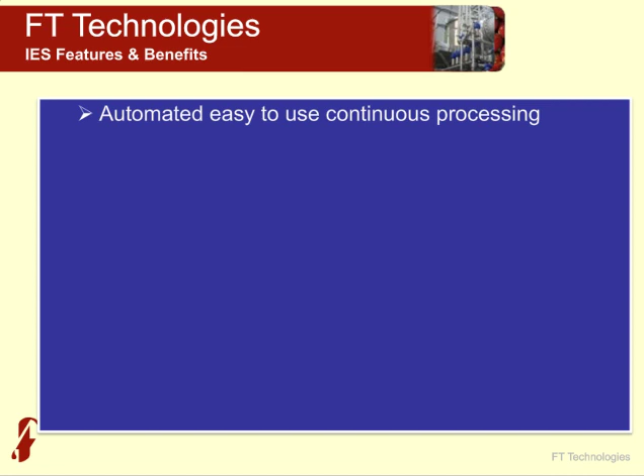The whole IES system can be operated by only one person, thus reducing your labor costs. It produces a consistent high-quality product because each step is predetermined and automated. High yields are possible for producing RTD tea, and of course, all of this improves the profitability and operations of your company.

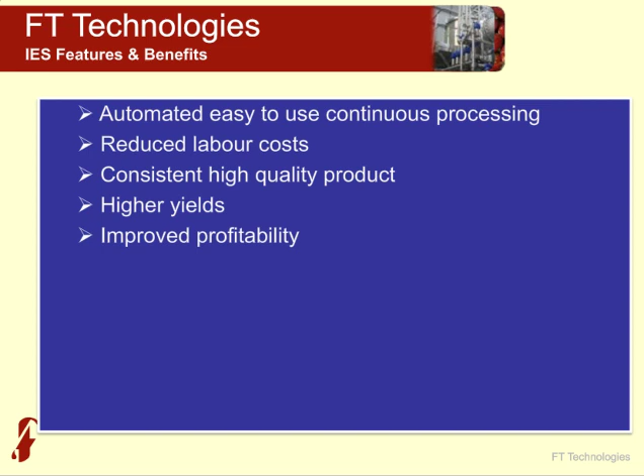The system can be supplied as a complete, compact process line with all tanks, pipework, and pumps for the production of aroma, extract and concentrate, or we can implement a staged process where we start with the first step and then later move to the second and third stages. The whole line has automatic clean-in-place functionality and low ongoing maintenance, making this a very easy system for most customers to implement and operate.

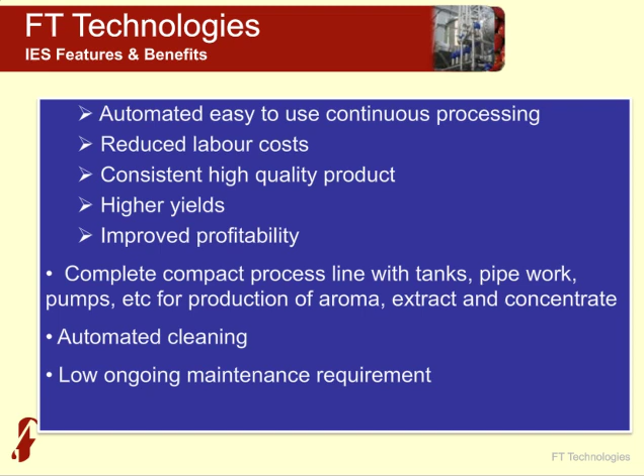The IES system uses our core expertise of thin film distillation and evaporation, where we create a film thickness of less than 1 millimeter in both the spinning cone column and the Centritherm evaporator. With the addition of short residence times—only 25 seconds for the aroma and extract, and only 1 second for the concentration step—we obtain minimal degradation and a higher quality product.

So the IES system produces a high quality flavor and aroma that can be added back to your final product or sold in its own right. It produces a high yield of soluble solids, and also a premium concentrate where the color and active constituents have been preserved. So if you're producing ready-to-drink teas or coffees, or even aromas from vegetables and fruits, the IES system can help you consistently make a high-quality product.

Con, back over to you.